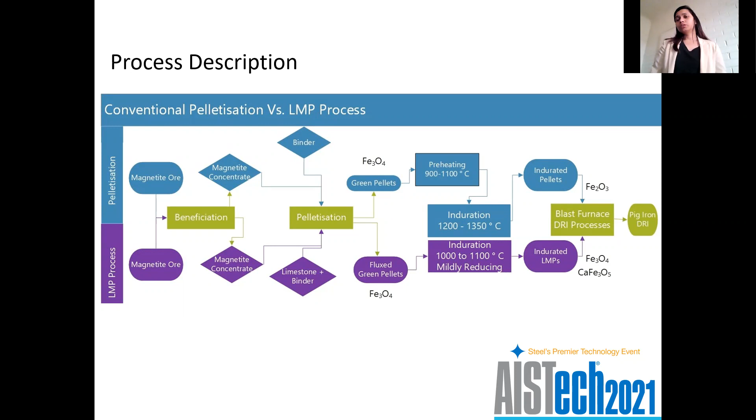So LMP again starts with the beneficiation of magnetite ore to concentrate, and then during the balling stage, we add flux to form these fluxed green pellets. And then the fluxed green pellets go to a one-stage induration process at 1000 to 1100 degrees centigrade in a mildly reducing atmosphere. Mildly reducing because we don't want to oxidize magnetite to hematite, and it also ensures the formation of this CWF phase, CaFe3O5 phase, which we have found to improve the strength and reducibility of the LMPs at higher CWF percentage. So these indurated LMPs with CWF phase are strong and reducible enough to be charged to these blast furnace or DRI processes.

Now, we have been working on this process for a very long time now, 4 or 5 years. And so, first of all, I'd like to discuss some of the results from our previous work, and then some pilot testing results and cost and emission analysis.

So this is a simple binary phase diagram of magnetite and lime. And what it shows here is that this CWF phase is a stoichiometric compound of 1 mole of magnetite, 1 mole of lime. It forms at about 28% of lime. And the diagram is also superimposed with the lime requirement of different iron making processes. So for the blast furnace, we have the lime in the range of about half stoichiometry LMP, which is 1 mole magnetite, half mole lime or limestone. And so that's why we have selected this half stoichiometry composition for our pilot testing experiments.

Now, obviously, for our laboratory experiments, we have looked into this whole range, starting from stoichiometry to half stoichiometry, to see the effect of composition on the percentage of CWF. And we have done experiments in this temperature range from 950 to 1050, and the minimum temperature is 950 because we want to ensure complete decomposition of limestone, and you don't want to go more than 1100 because we want to avoid the slag formation, because that will affect the reducibility of the LMPs.

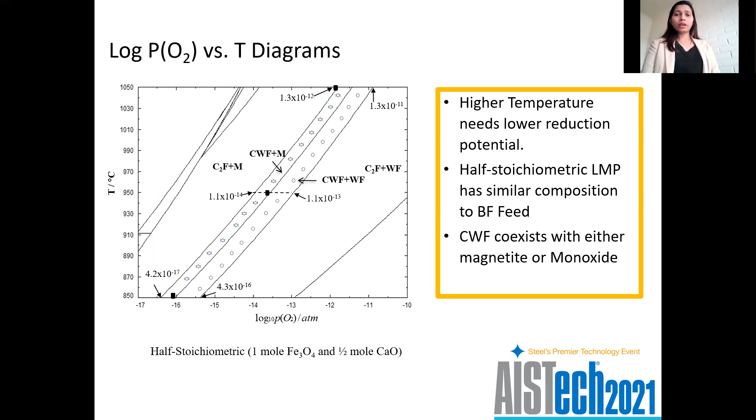The reduction potential that we have chosen was based on the temperature and based on these log pO2 versus temperature diagrams. We have also done several experiments on studying the effect of reduction potential on the CWF percentage before, and these are some of the experimental results that I'd like to discuss today.

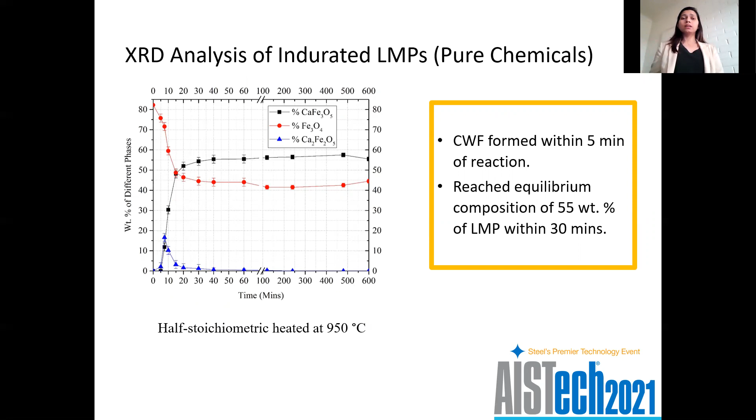So these are the samples that were indurated at 950 degrees centigrade. The samples were pure laboratory chemicals without any impurities in them, 99% pure. And the LMPs were found to produce CWF within about 5 minutes of reaction, and we saw about 55% of CWF within 30 minutes of reaction, and that is near to the equilibrium percentage predicted by the phase diagrams.

Other than the CWF phase, we also saw some calcium ferrite phase like C2F, 2CaO.Fe2O3. They started to form at the beginning of the reaction, and then the percentage decreased with progress of the reaction.

Other than these laboratory experiments, laboratory synthesis of the LMPs, we also conducted a scaled-down version of the pilot tests on a small amount of the LMPs from pure chemicals, and we found that the properties were similar to the industrial sinters. So we decided to do the pilot synthesis as well as pilot testing.

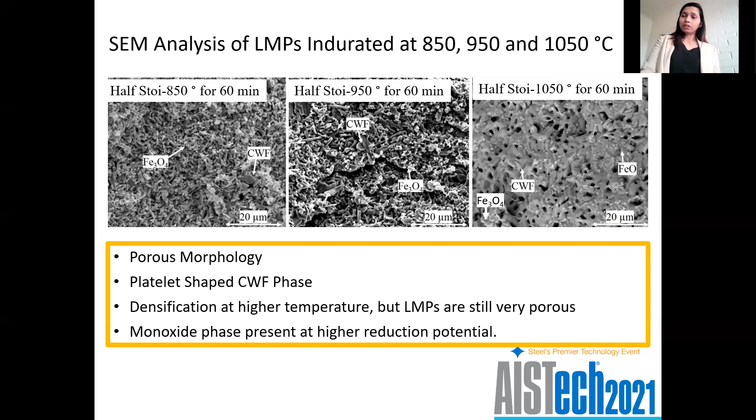The pilot synthesis was done with the magnetite concentrate from OneSteel and limestone ore, and both of them were crushed to 45 microns. The limestone was crushed; the concentrate was already at 45 microns. They were mixed together, and 8.5% water was added. Then we made the seeds, followed by balling. The balls were mostly plus 10 mm size, and the green balls were dried at 110 overnight, followed by induration in a vertical tube furnace at 1050 for 2 hours.

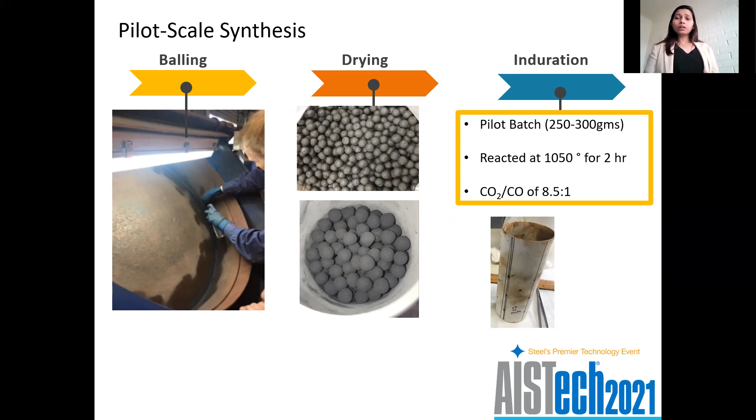We did the experiments using these crucibles, which had holes on the side. This is before we made the holes. The height of the crucible is about 13 centimeters, and the hot zone of the furnace is about 10 centimeters, so we could fit about 250 to 300 grams of sample in every batch. Obviously there was a temperature distribution inside the crucible as well, plus minus 20 degrees. We conducted the experiments at different CO2/CO ratios, and because of this temperature gradient, we decided to take 3 layers of the samples, top, middle, and bottom, and analyze them under XRD and SEM.

These are some of the results. All 3 layers look quite similar in the XRD diffraction pattern, and we did the Rietveld quantification of these 3 layers for all the experiments at different CO2/CO ratios. At higher reduction potential, we see a higher amount of the CWF phase, about 21. But the top layer sample also showed some FeO phase, about 30% FeO, and we do not want that because FeO is denser; it will affect the reducibility. So we decided to stick with the 8.5:1 ratio for synthesizing the large amount of samples for pilot testing. These samples had about 1.5 to 8% maximum FeO and about 15 to 17% CWF.

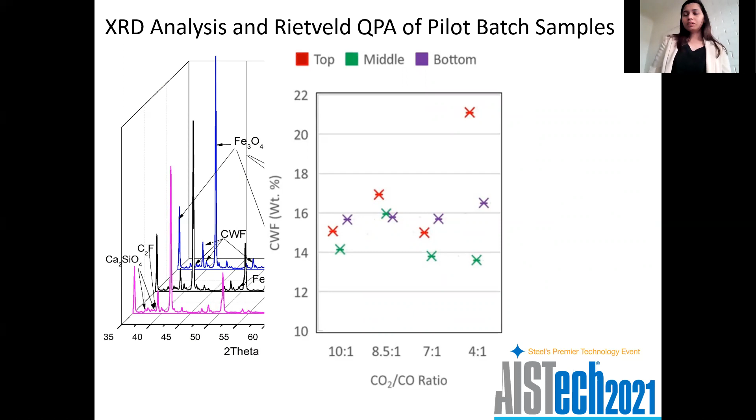All the pilot testing was based on ISO standard tests. The reducibility index was measured by reducing 500 grams of sample at 900 degrees for 3 hours, 30% CO, 70% nitrogen, 15 liters per minute flow rate, and whatever the degree of reduction is after 3 hours is considered the reducibility. The reducibility of LMPs was found to be more than 90%. The acceptable reducibility of sinter is more than 60, for pellets more than 70, so the reducibility of LMPs is quite high.

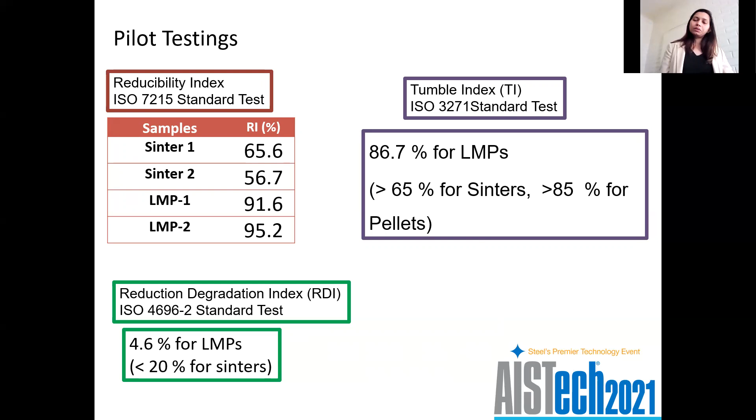With the pilot testing results, we have also proposed a flow sheet of the LMP process. This is similar to the current pelletization process with blending, like with a V-blender to mix the feedstocks together, followed by a balling stage, then a conveyor belt to transport these pellets to the kiln, and also dried when they are being transported. Then during the induration, we have considered two separate processes, one with rotary kiln, one with rotary hearth, for the cost analysis.

And then the pellets are cooled down in an annular cooler. The off gases, the sensible heat of the pellets are being utilized to preheat the air that can be used in the heating stages. And then the cool pellets are screened, and the fines are then recycled back. There will be a crushing stage involved somewhere in this part.

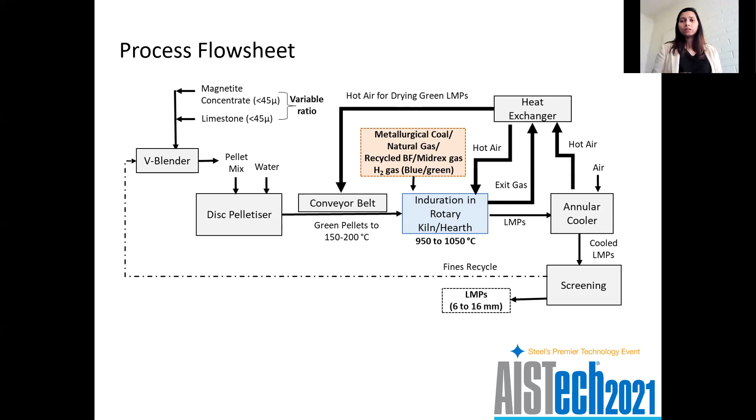Now, we have analyzed the emissions for this LMP process by considering different types of fuel going into these kilns: coal, natural gas, recycled Midrex, recycled blast furnace gas, and hydrogen gas, both blue and green hydrogen gas. And then we compared the LMP process, followed by blast furnace iron making, with the base case iron making in blast furnace with 70% sinter and 30% pellet.

And the results show that when the LMPs are made with natural gas and followed by blast furnace iron making, it will reduce the CO2 emission from the base case by up to 18%. With grey hydrogen gas, it's up to 13%. Grey hydrogen gas is where we are forming the hydrogen with steam methane reforming, and there is no carbon capture and storage involved in that. So with that, we are reducing 13%. These are the direct emissions. And with green hydrogen gas, we can save up to 32% of the emission.

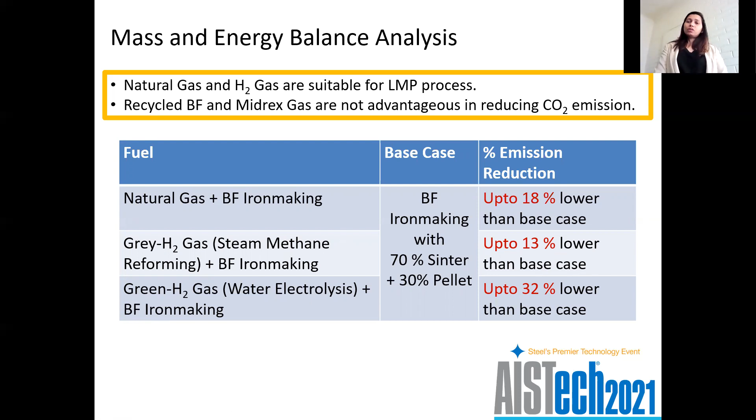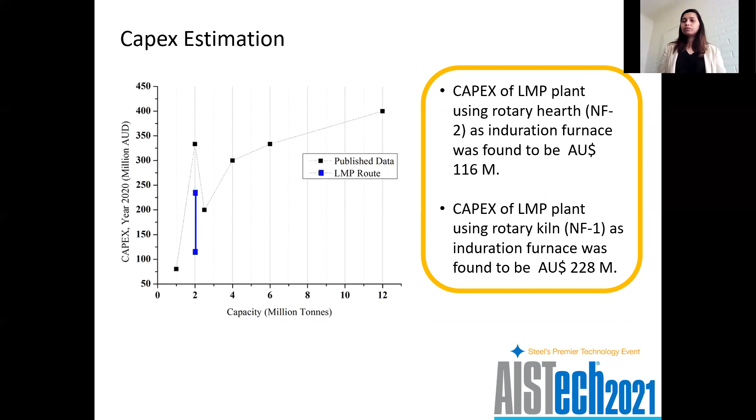Now, the capital cost of the LMP process we estimated for the flow sheet with rotary kiln and the flow sheet with the rotary hearth. With the rotary kiln, the capital cost is about $230 million. With rotary hearth, it's about 120 million Australian dollars. And then we also estimated the operating cost of the LMPs. These horizontal lines here are the base case operating cost of the LMPs.

So the LMPs produced using natural gas have an operating cost of about 155. The green hydrogen gas is about 220, which is about $70 more compared to the natural gas. The blue hydrogen gas, which is with carbon capture and storage, will be about $20 more than the LMPs produced from natural gas. Now, compared to new facility two, when we have the rotary hearth furnace, we will decrease the LMP cost by about $7 to $8, no matter what fuel we are using.

Now, we also had to check the sensitivity of the operating cost to a plus or minus 30% change in all these cost parameters, like magnetite concentrate, fuel cost, and capex. And what we see here is that the operating cost is highly sensitive to the magnetite concentrate cost, followed by the green hydrogen cost, followed by blue hydrogen, and then the capital cost.

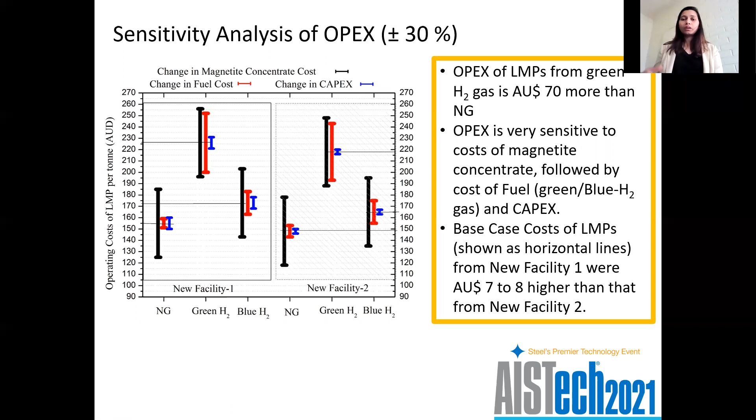So with this, I'd like to conclude my talk. What we find so far is that LMPs are highly reducible. They have a lower reduction degradation index, and they have good thermal strength and are suitable to be transported or shipped to different parts of the world. And they are complete saleable products. They're associated with low carbon footprints, and they're economically attractive options as well.

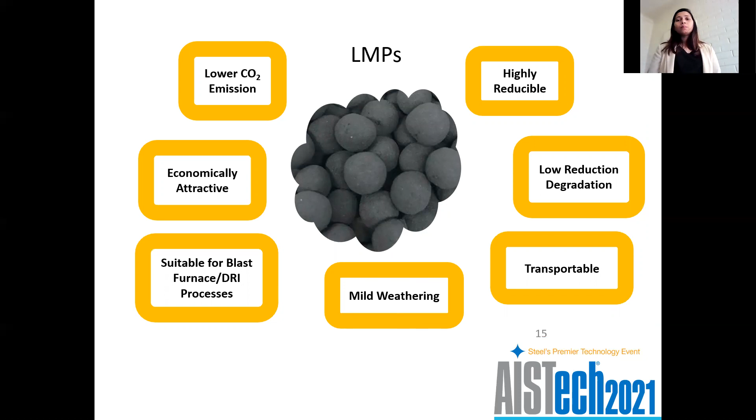So far we have seen mild weathering of these LMPs, but we need to do more experiments in this area. But the results from the pilot testing and the cost and emission analysis suggest that LMPs are potential feedstock for blast furnace iron making, and also in terms of properties like strength and reducibility, they are suitable for DRI operations as well. However, the chemistry needs to be adjusted for the DRI process, obviously.